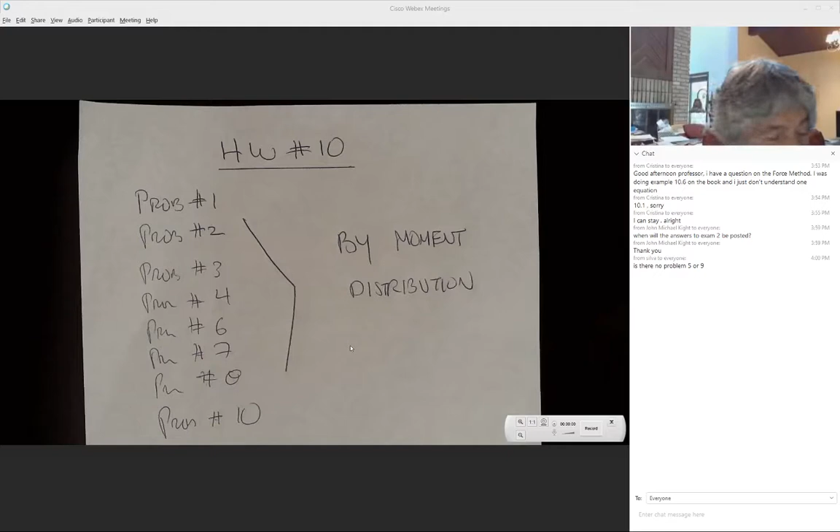Okay, we're ready. Welcome back. Probably you already seen my email. The university has changed the date and the time of the exam. Now your exam is on the 11th, and it is from 3 to 4:50. Also, there is a change in the amount of time that you get. You only get 1 hour and 50 minutes.

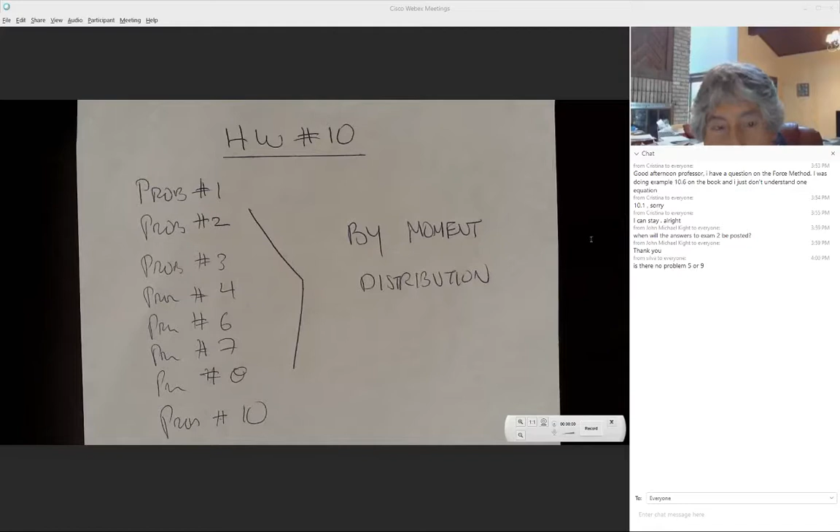Well, let me answer a question here. So in homework in the past, before we had some changes, we had homework number 10 and homework number 11. So now I had combined homework number 10 and homework 11 into just homework number 10. And these are the problems that you have to solve. You have to combine the problems that I put in Blackboard before from homework number 10 and homework number 11. And these problems are due on Wednesday next week.

So these are due on Wednesday next week. So it's not due on Monday. You have until midnight on Wednesday to submit. This is the last set of homework problems that I'm assigning. So I had combined number 10 and number 11 into the new number 10. So there's no problem 5, there's no problem 9. Does that answer your question?

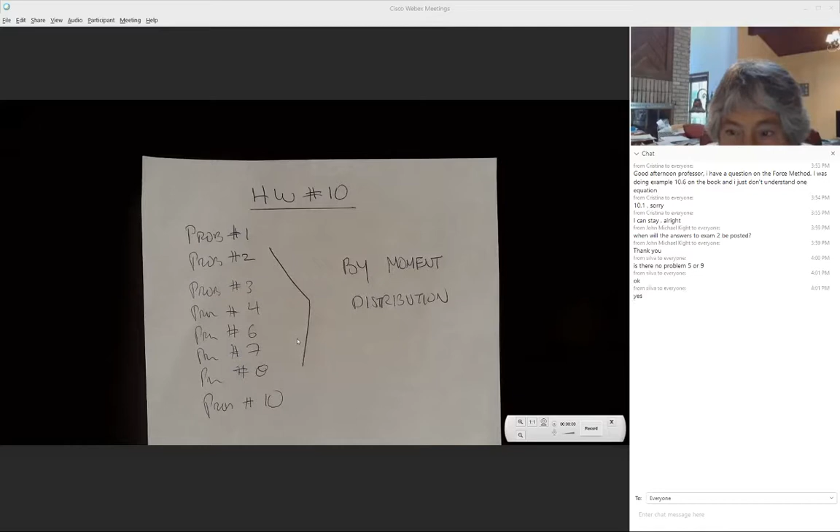Okay. Yeah. All right. So I was saying that the exam had changed. Now it's on a Monday on the 11th, only hour and 50 minutes. The results of exam number 2, as you know, were very disappointing, they were bad, and it's not your fault. It's just the coronavirus fault. So what I'm going to do in the final exam, just want you to listen carefully. I'm going to give you a bonus.

So the final exam is going to have 2 questions. One question where you're going to be able to get 100 points, and another question that is going to be a bonus. So I have not decided yet how much time I'm going to give you per problem. But probably the problem that is worth 100 points, you're going to get more time. But definitely, I'm going to give you a bonus to try to help in the next exam. Any question before I continue?

Okay, no question. Last time you said we all have 5 point bonus. Well, that was before we had all of this problem. Normally, for our reaccreditation, we need to pick up on most of the courses binders with exam, homework problems, class notes. I don't know if this is going to happen. I was going to give you maximum 5 points in your final exam grade. For instance, if you would have gotten 90, I would have given you maximum 95. If you would have had 30, maximum of 35. But I need to double check with the department chair if we're going to do that this semester because everything has changed. Any other question?

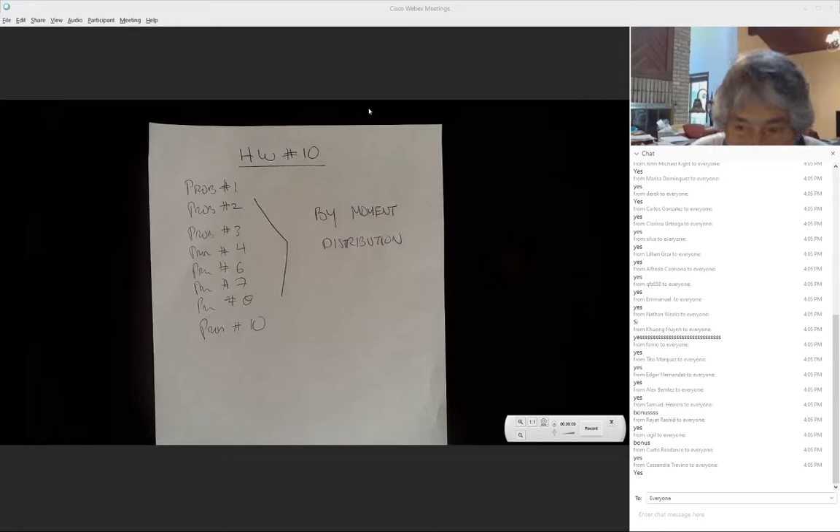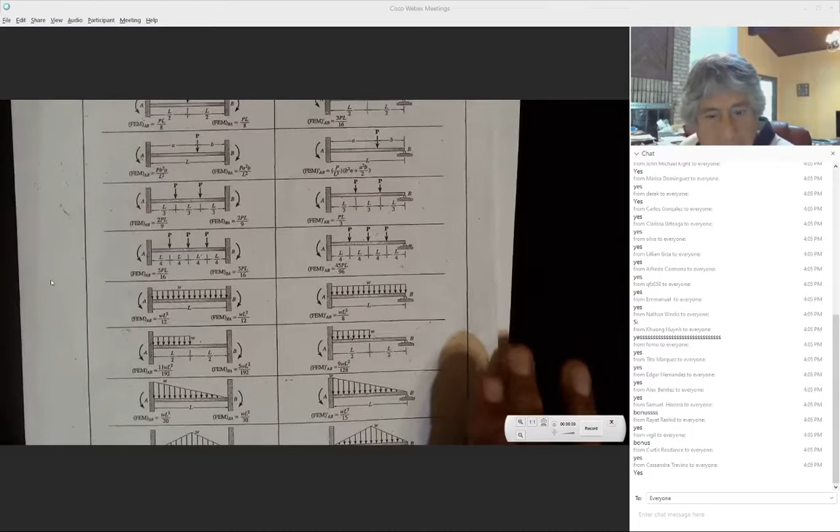I want to show you this case because all the others can be worked, or you can do the computation the same way that I'm going to do it for this one. This is a typical fixed-fixed case. Whenever we had a uniform load, the moment on the left is WL squared over 12. The moment on the right is also WL squared over 12.

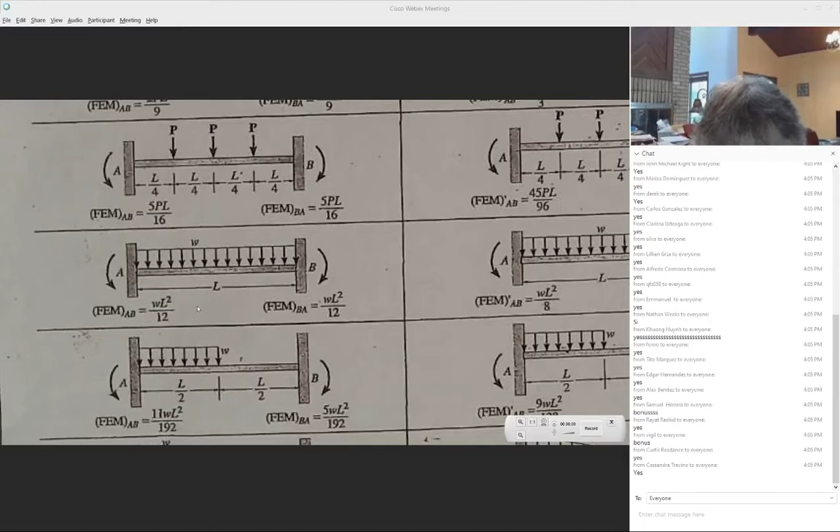If we remove this wall and put a pin, that means there is no moment. If we remove this wall and this one stays, this value is going to change. This value is going to be WL squared over 8. I'm going to show you how to find this value.

We can also leave this wall on and remove the other wall. These are the cases that are not in the table. I'm going to show you the first one. I'm going to remove this wall and show you how to compute this value.

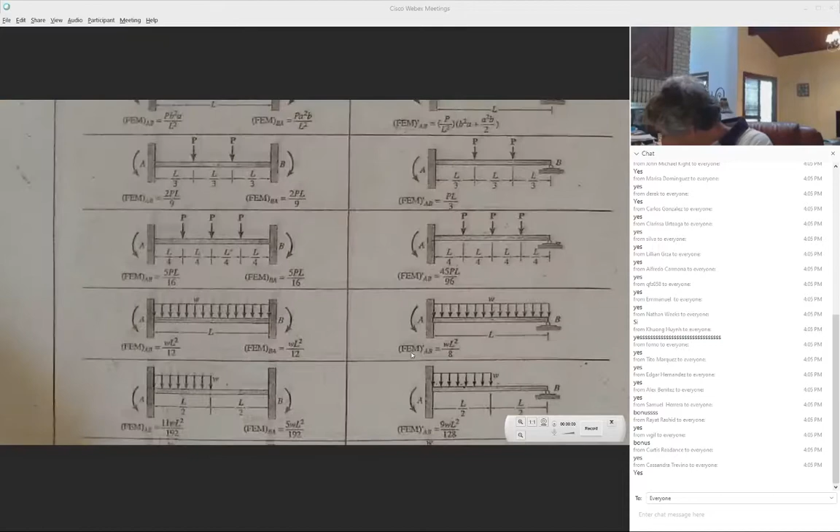We start with WL squared over 12. The one on the left-hand side is negative. The one on the right-hand side, according to the sign convention, is positive. So this is what we want to obtain, the one on the bottom: a pin, no moment, and a moment at this wall.

So what I did, I had this value here on the top that is plus WL squared over 12. And I put a negative WL squared over 12. That means that the moment is 0. Since I'm putting a negative WL squared over 12 on this side, I need to send 50% of this value to the opposite side.

So now in here, I had the original WL squared over 12, and I had a negative WL squared over 24. If you combine these two, it gives you a minus WL squared over 8. I'm going to show you again. So we start with this: negative on the left-hand side, positive on the right-hand side. We need to make this one 0 because we're going to change the support.

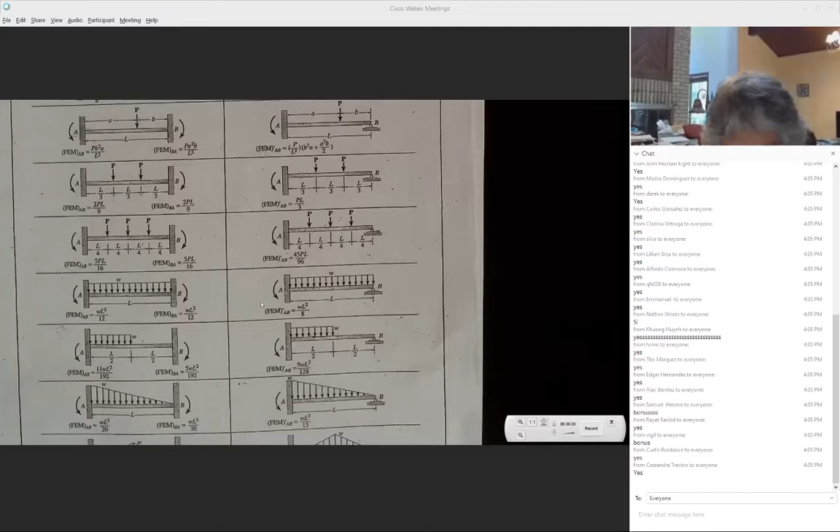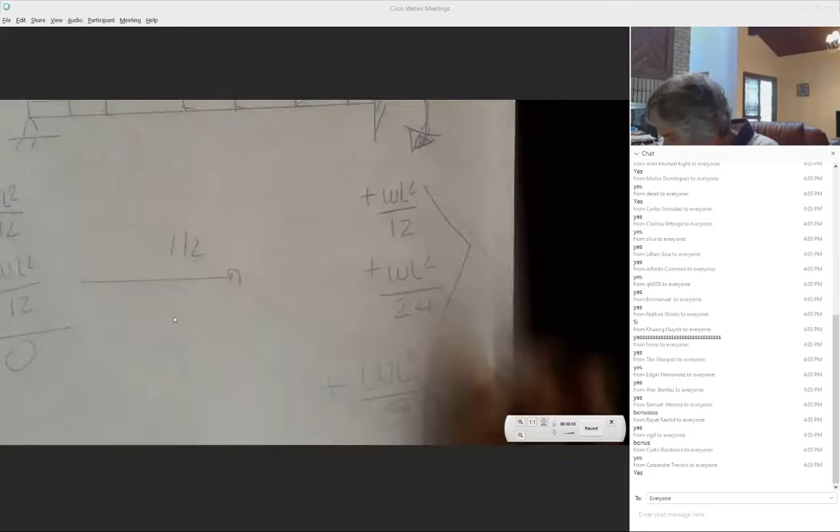This is what they have in here. I'm going to do something different that is not in the table so you will know how to handle these cases. Now I'm going to release this side and leave this one fixed. So we're going to start with the same WL squared over 12, negative on this side, positive on the opposite side. Fixed, fixed. I'm going to leave the wall on the right side, but I'm going to remove this.

So what I'm going to do, since this is negative, I'm going to put a positive, equal and opposite. So the moment now is 0. Whatever moment I put on this side, 50% goes across, of the same sign. So 50% of this is WL squared over 24. If you add those two, you have WL squared over 8, but positive and not negative like the previous one.

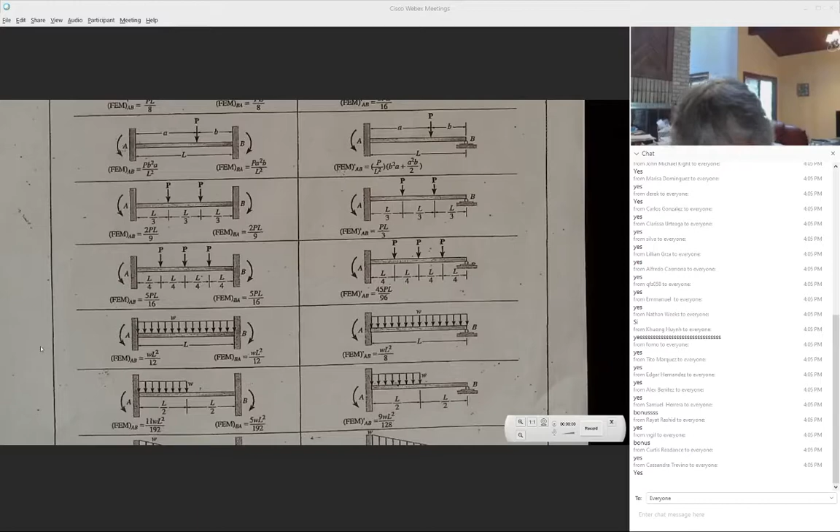So how do they obtain all of these values for each one of these cases? Equal and opposite, 50% across. So you can build this table, and you can also build any table, as long as you understand that whenever you put an equal and opposite, 50% goes across. So this is just a clarification because some people asked me during the week.

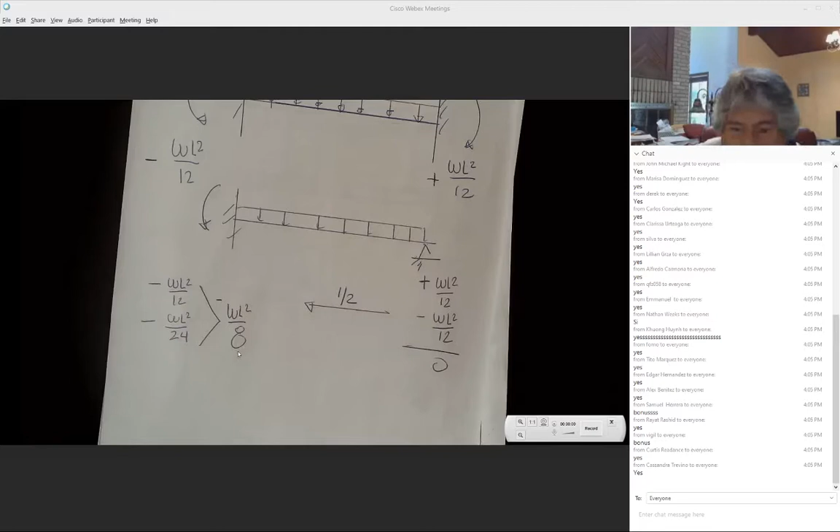Now I'm going to go to moment distribution again. There's nothing easier than moment distribution. This is the problem that I started the other day. And please pay attention.

And some people asked me several questions. This is page 4 of 18. This is the same problem that I was working on last time. Look, this is fixed. There's a moment in here. This is a fixed moment, and there are moments equal and opposite, BA and BC. And in this problem, I for the girder is different than the I for the column. So the stiffness of member AB is 4EI over 16. This comes from the previous method, from slope deflection.

The stiffness of this member is also 4E, but 4EI, but I is 1.5 over L. So this method uses the same as the previous one. It uses fixed end moment. So for this load that is at the center, it's going to be PL over 8 on this side, PL over 8 on the opposite side. This is going to be negative, this is going to be positive. And this comes from the table.

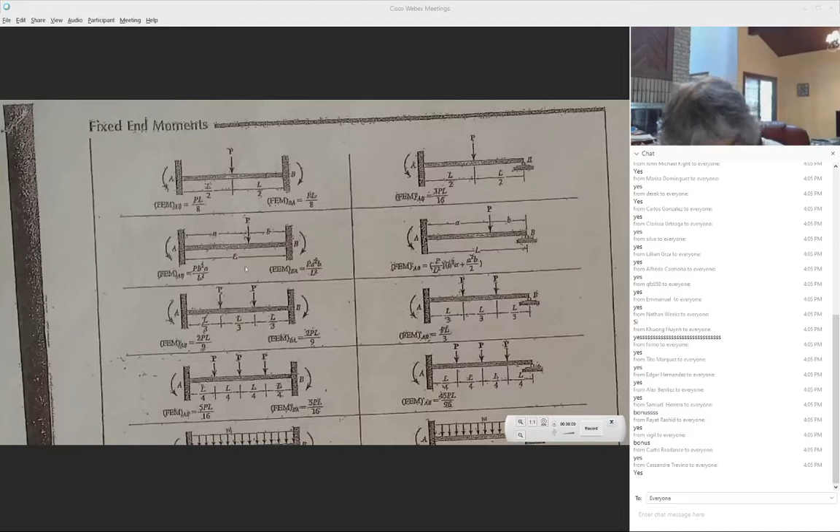This is case 1, the very case at the top of this page. This is PL over 8, PL over 8, because the load is at the center. If the load is not at the center, they call it letter A and letter B. And just in case, it doesn't mean that A is larger than B. It's just they are showing it that way, but you never change. This is A always, and this is going to be B. No matter how small or how large, this is A and this is B. But the moment, whenever it's not at the center, you compute it by this. So PL over 8.

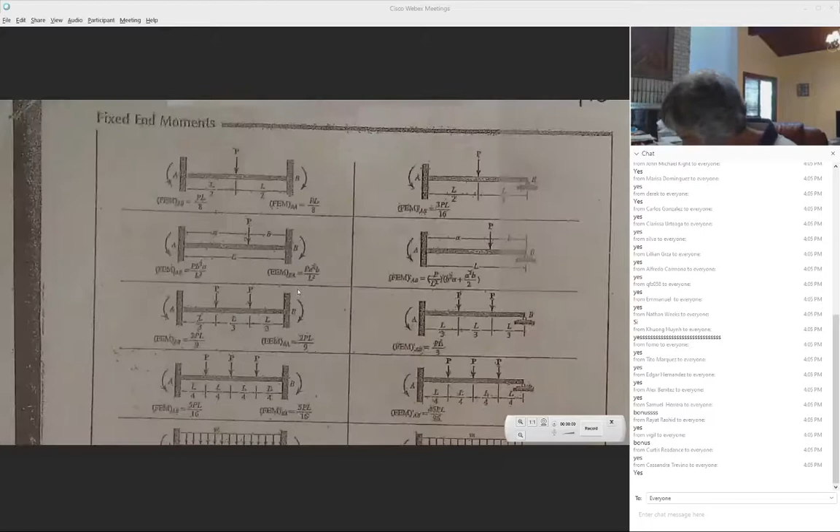So this is P, and 16. So I've done it in here. The one on the left-hand side is negative PL over 8, minus 40. The one on the right-hand side, PL over 8, positive, plus 40. These are the fixed end moments for member AB. Member BC, if you look at BC and I rotate this page, the one here on the left is similar to this one. That's why this is going to be negative and this is going to be positive. But also PL over 8.

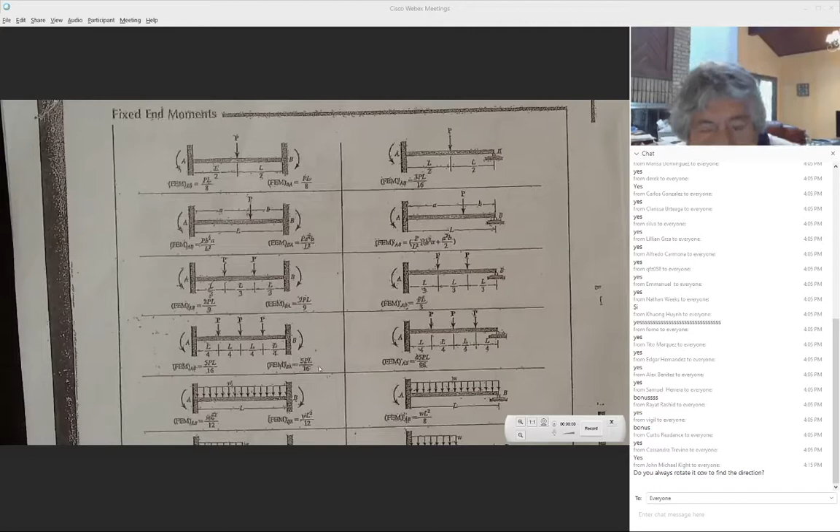I have computed it here for BC and CB. PL over 8 negative, PL over 8 positive. So you rotate to find the direction. We consider that, according to the sign convention, whenever you have a gravity load that is going down, all the moments on the left are going to be counterclockwise. All of these are negative. All the moments on the right are going to be clockwise. But I had rotated, if that is your question, because whenever we had a column,

whenever we had a column and the wind is blowing from right to left, this one on the top, John, tell me, is this one on the top positive or negative? Negative. And the other one is positive. Now I'm going to rotate the wind. The wind is funny, it comes now from this direction. The same case. Now the wind is coming from this direction, and this is a column. What is it, John? Is this positive or negative? Negative, right?

So there are certain cases where, for you to determine the sign, you might have to rotate the table, so it will be easy. But when you become familiar with the table, you just look at the load and you're going to know which one is positive and which one is negative. I mentioned it last week, and I repeat it again. In PL, L is the span, because a common mistake in the exams is they use 6 instead of 12. L is this span. That's why here at the bottom, I have computed PL over 8. 12 is the span. Negative, the one on the top.

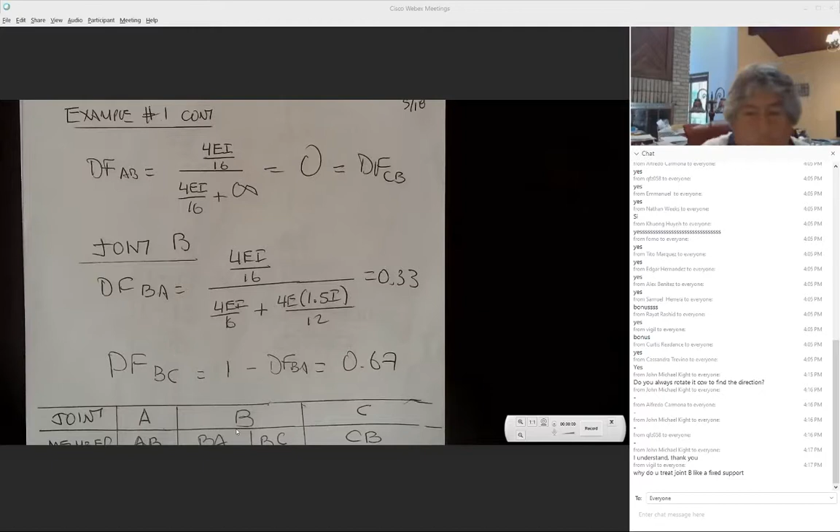It is called moment distribution because it distributes the moment based on distribution factors. The distribution factor from A to B, since we have a wall at A, is 0. The same at C. So what it means is that this fixed support at A and the fixed support at C do not return anything. Any moment that goes in here doesn't come back, because they have an infinite amount of resistance to the moment.

There is a question from Vigil. Why do you treat joint B like a fixed support? Okay, please, somebody help me. Why do I treat joint B as a fixed support?

Anybody? And he's talking about the moment that I'm computing. No, what it is, the fixed end moment. Always consider that the moments are fixed. And later they allow the rotation. If it's not fixed, they allow the rotation.

So to compute the fixed end moment, we assume that everything is fixed. That's why, look, this A is fixed, C is fixed, but B is not fixed. B has a rotation. But to start the problem, to compute the fixed end moment, we always assume fixed. The same that we did for the previous method. We compute the moment called fixed end moment because we assume that this is fixed and this is fixed. And later, we're going to allow the joint to rotate.

Vigil, you understand that? Okay. So remember, we assume like we did in the previous drawing, fixed to start. That's why we had to compute the fixed end moment from A to B, from B to A, from B to C, and C to B. We always compute the fixed end.

I was saying that the fixed support, you can put an infinite amount of moment. So the distribution factor is always zero. It means that it doesn't return anything that you put at that joint. That's why the distribution factor from A to B at the support is zero, the same as C. But at joint B, we're going to distribute the moment based on the stiffness of the joint. Since the joint has different stiffness, look, 4EI and 4E times 1.5I, 16 and 12, they're different stiffness.

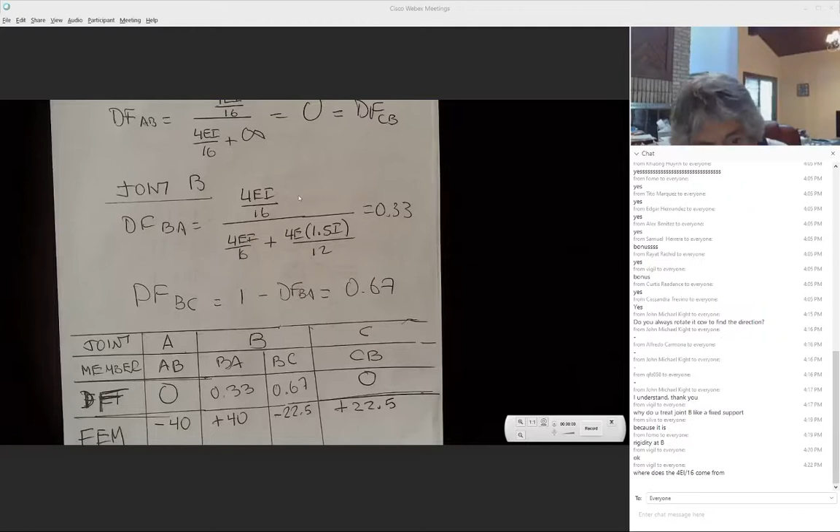So for member BA it's 0.33, for member BC, 1 minus the previous one. They always add up to 1 because that means 100%. What we're doing in here is a proportion. So if one is 33%, the other is 67%. And after that, I asked you the other day to build this table with me. So in this table, we put the joint A and member AB.

Look, joint A has member AB. Joint B has members BA and BC. And joint C has member CB. You see, joint A has member AB. Joint B has two members, BA and BC. And joint C has only one member, CB.

After that, we put the distribution factor. AB fixed support 0, CB fixed support 0. And BA, we computed at 0.33 and BC 0.67. We have to be careful. I'm going to answer your question, Vigil. We have to be careful where we write it. Okay. The stiffness, member AB, 4EI over 16. And the 4EI comes from this.

So whenever we had a near end that is pinned and a far end that is fixed, whatever we put in here, 50% goes across. So the carryover factor was equal to 1/2. Later, we're going to modify the stiffness. Later, we're going to do this. The near end is pinned, but the far end is also pinned, the end of a member. So there's still a theta A in here. But this moment is only 3EI theta A over L, and nothing goes to the opposite side because it cannot take it.

So whenever we modify the stiffness, we're going to use 3EI over L. Whenever we don't modify, 4EI over L. So those are the numbers that we use. So the stiffness of this member is 4EI over L. The stiffness of this member is also 4EI over L because I'm not modifying the stiffness. Later, in another problem, I'm going to use 3EI over L. Okay, anybody have another question about the 4EI? All right. So remember the stiffness comes from the previous one.

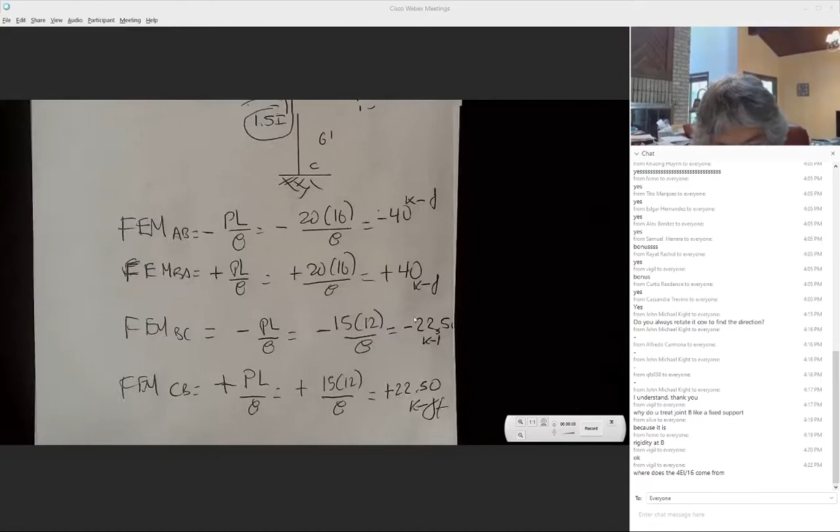So what we had to do, we built a table. And in this table, we already had the distribution factors, and I was telling you, we had to be very careful not to reverse this. BA has to go in the BA. BC has to be in the BC. We cannot reverse this because we're going to change the problem. These are the fixed end moments, assuming that it's fixed, minus 40 plus 40. I did a computation in here. Minus 40 plus 40, minus 22.50 plus 22.50.

So this is the way we start the problem. We have to have distribution factor and we have to have fixed moment. The fixed supports are always in equilibrium because you can put an infinite amount of moment in the fixed support. So A and C, they're always in equilibrium.

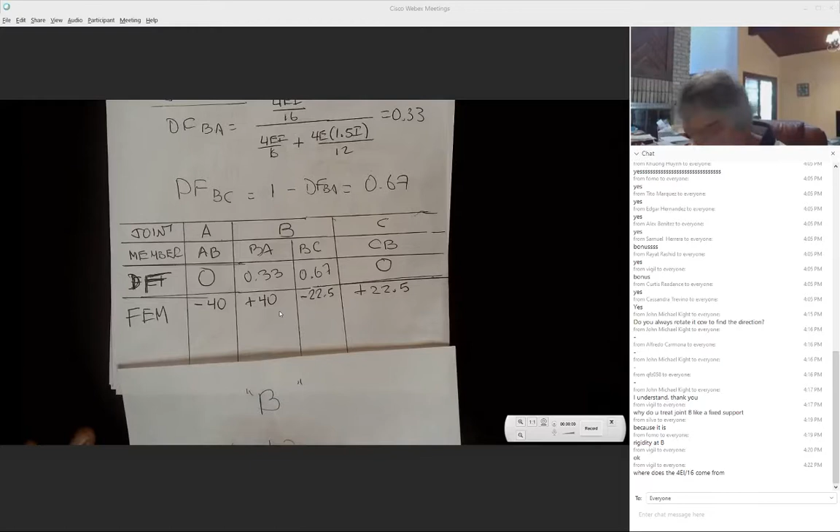Joint B right now is not in equilibrium because of the moment that we have right now at B. At joint B right now, we have plus 40 minus 22.5. The summation of moments at any joint has to be equal to 0. So if you look at plus 40 minus 22.5, right now we had a plus 17.50.

Joint B is not in equilibrium because we had a plus 40 minus 22.5. Right now, we had a 17.5 moment at this joint. To put it in equilibrium, we need to put an equal and opposite moment to the joint, so the sum is 0. That means equilibrium. So at this joint, I'm giving a minus 17.50.

33% is going to come to this side because that is the distribution factor. That's how we distribute by stiffness: the stiffer member receives more moment. So 33% goes here, 67% comes here. Whatever moment I put in here, 50% goes to the opposite side because of the carryover factor. And this is what we did the other day.

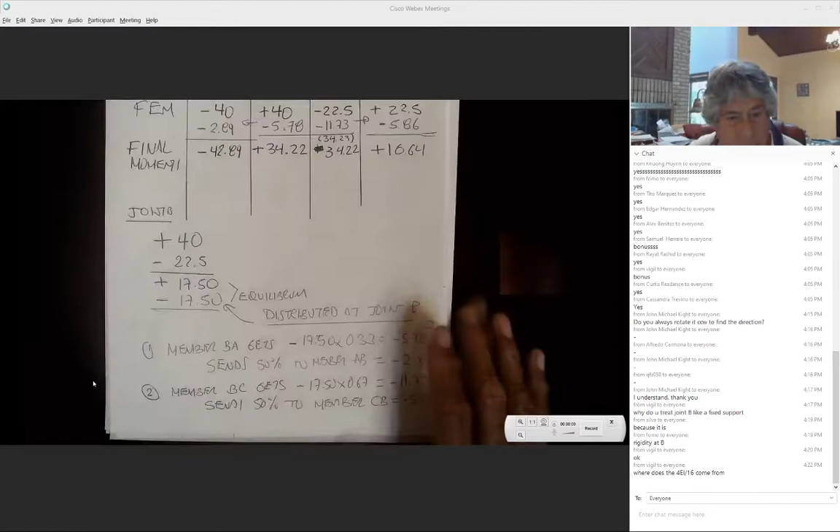So if you look at the notes, at joint B right now we had a plus 17.50. To put it in equilibrium, meaning summation of moments equal to 0, we need to give a minus 17.50. How do we distribute? Member BA gets 33%, 5.78. Member BC gets 67%, 11.73. Remember the sign, minus. The carryover factor takes 50% across, minus 5.86.

Whatever I put in here, the carryover factor takes 50% across. And since the fixed support can resist an infinite amount of moment, there's nothing left. This is like when you balance the checkbook, there's nothing left to pay. That's it. So the problem is finished. We put a line in here.

So we start with fixed moment, and this joint is not in equilibrium. We put an equal and opposite moment, that was minus 17.50. To this side came 33%. To this side came 67%. Whatever moment I put on this side, 50% goes to the opposite side. Nothing comes back. So this is the end of the problem.

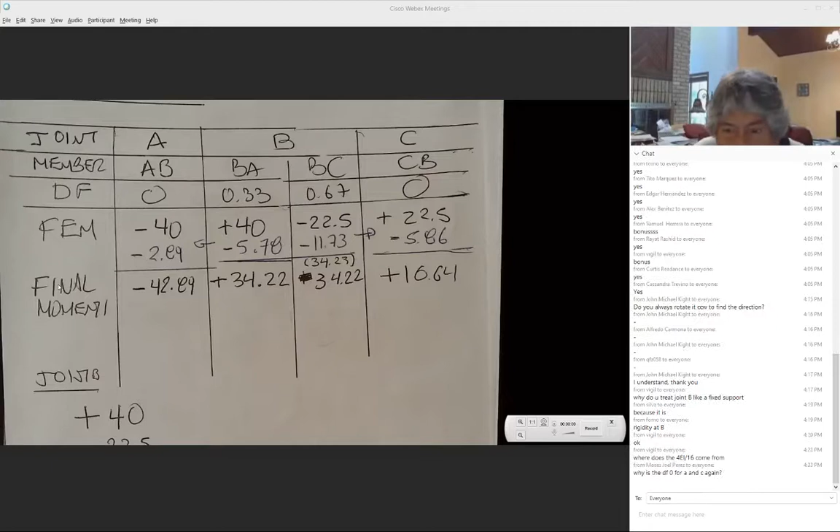Sure. This is joint AB, right? This is the wall. So here at the wall, we had two stiffnesses. We had a stiffness of this member, that is 4EI/16, and the stiffness of the wall, that is infinite. It's so stiff, it cannot be moved.

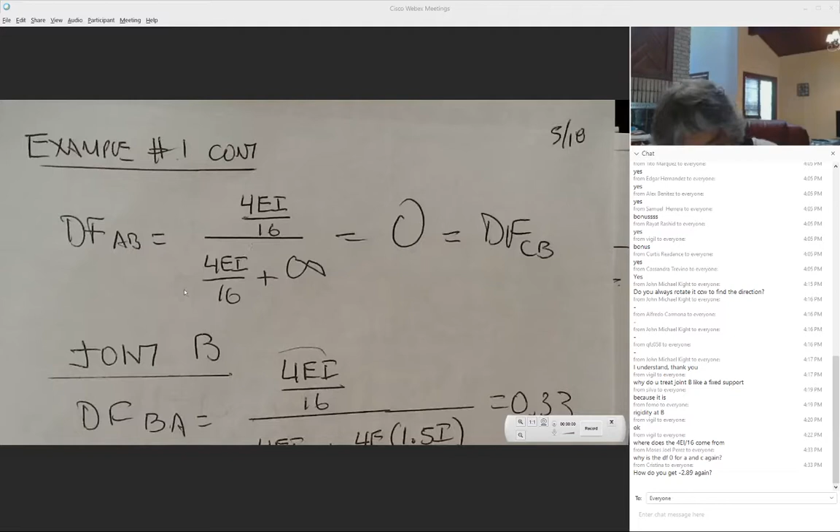So to compute the distribution factor at the support, AB is 4EI/16 over the stiffnesses of all the members framing into this joint. This is member AB, this is the wall. So anything that you divide by infinity is 0. That's where the 0 comes from. Does that answer the question?

Are you going to tell us when to use the carryover factor or not? It's obvious when to use it. You're going to see it in more problems. Okay, now, Christina, second: where the minus 2.89 comes from.

So, Christina, I don't know if you have your calculator, but I'm going to do the computation for you. Look, we had in here joint A and C, there was an equilibrium. This joint B is not in equilibrium because if we had plus 40 minus 22.5, this gives us a moment. Look, plus 40 at joint B minus 22.5, we had right now a positive moment of 17.50.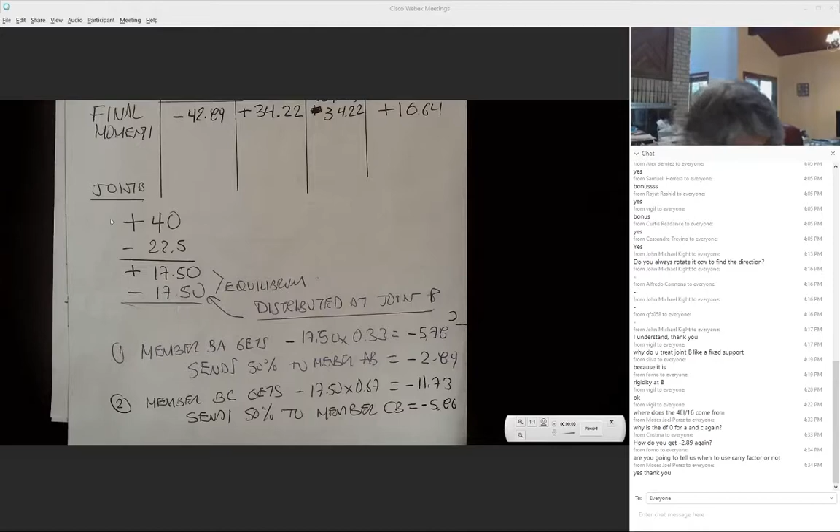To put in equilibrium means summation of moments equal to 0. So if I had a plus 17.50, I need to give to the entire joint an equal and opposite moment, minus 17.50. How do we distribute this? 33% of this moment, the negative, comes to here. This is the value. Minus 17.50, 67% comes to here. This is the value. Whatever I put at this end, the carryover factor is 1/2, send it to the opposite. Whatever I put in BA, I had to multiply times 0.5, the carryover factor, send 50% across.

And so, in other words, whatever moment I put in here, 50% goes to the opposite end, as long as this is a wall or can resist the moment. Whatever I put in here, 50% goes up. So where does that come from? From the previous method. The moment in here is 4EIθ/L. 50% of this moment goes across, is only 2EIθ/L. So the carryover factor is 1/2.

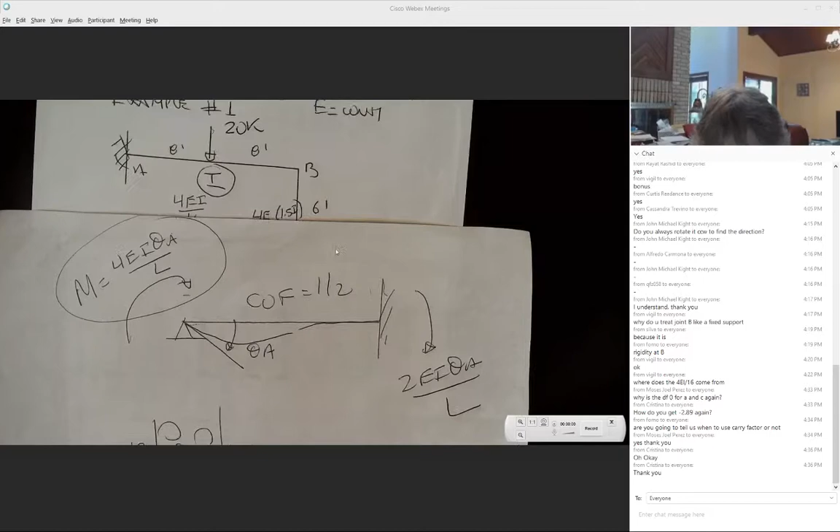So whatever moment I put in here, this little arrow indicates that 50% goes to the opposite end. Whatever moment I put in here, 50% goes to the opposite. So we add all of these moments, and these are the final moments. So to work our free body, from the original problem, I'm going to take free body AB. Free body AB from the original problem is going to have the load, 8 feet, and I'm going to call this AY and BY.

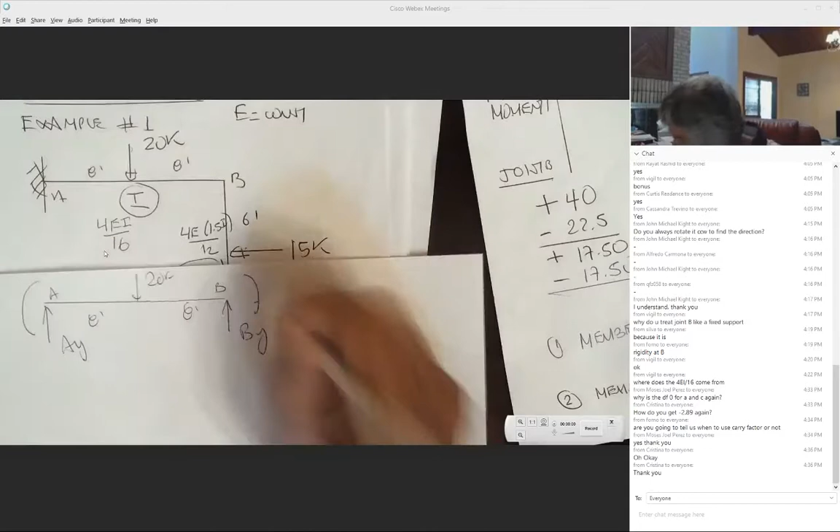But now I need a moment. I need the moment AB and the moment BA. So I come to this table. Look, AB 42.89. So this moment is 42.89. And moment BA is 34.22. So from the table, we got 42.89 and 34.22.

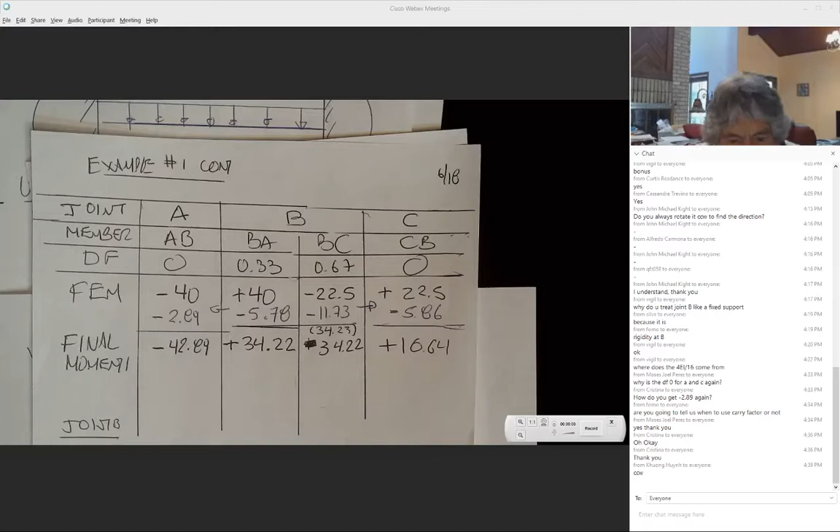But what is important is the direction. Counterclockwise or clockwise? Look at this. Minus 42.89. Anybody? Counterclockwise. And 34.22 positive, what direction? Clockwise. Perfect.

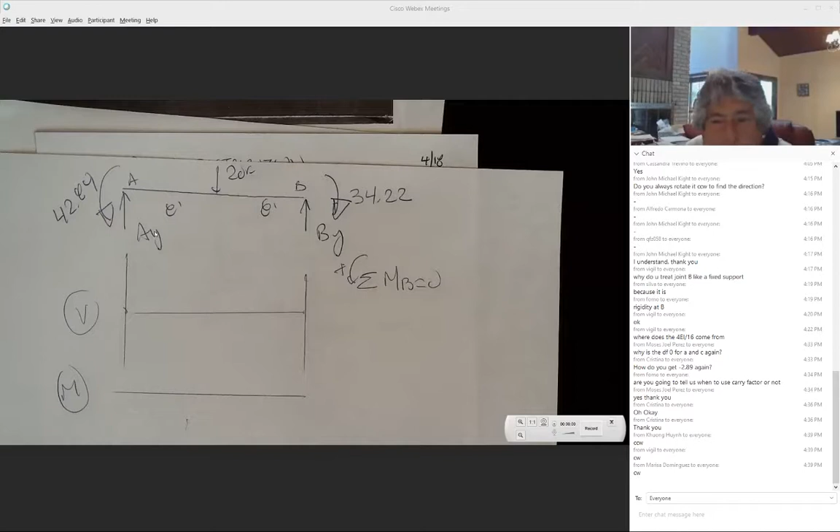So this is what we had now. We need to plot the shear and the moment diagram. So this is going to be my shear, this is going to be my moment for the indeterminate structure. So I need to find AY and BY. To find AY, I'm going to say summation of moments about B equal to 0. So we are back to chapter 1, back to what you've been doing since you took statics for the first time, when you took mechanics of solids, computing reactions.

So I'm going to do summation of moments at B equal to 0, and just for the equation, I'm assuming that that's the positive direction for my equation. You could assume the opposite direction as positive, the answer is exactly the same. But you have to consider all the forces. AY times 16. Because it's opposite to my assumption, it goes with a minus.

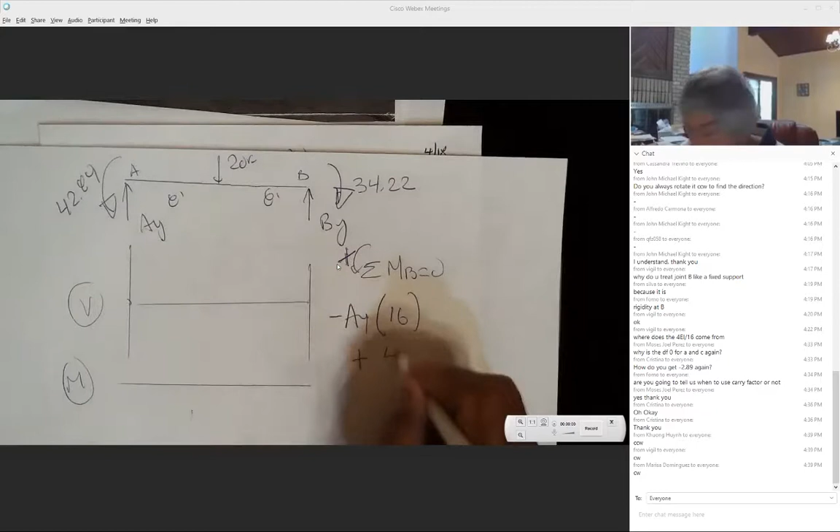Plus 42.89, because it goes in the counterclockwise direction as indicated in here, minus 34.22, plus 20 times 8 equal to 0. Look, I have applied moments about this point. Minus AY times the distance 16 plus 42.89 minus 34.22 plus 20 times 8 equal to 0. We find this reaction and we find that reaction, and this is what I've done in the next page.

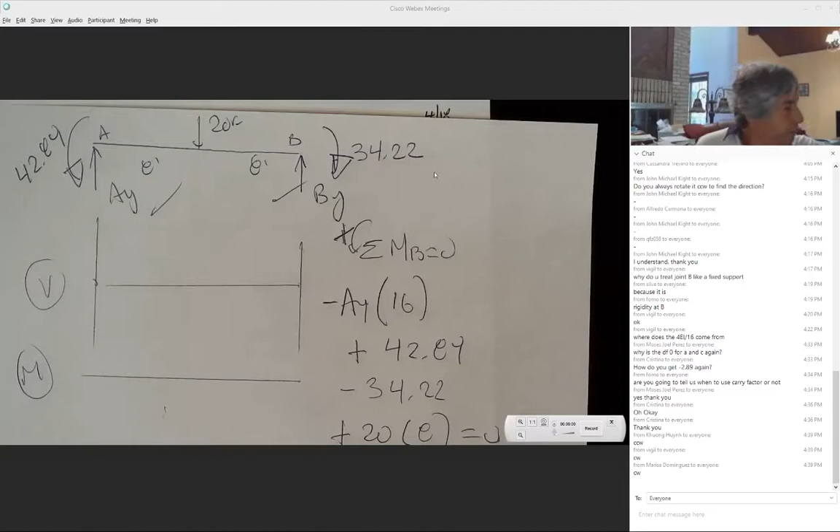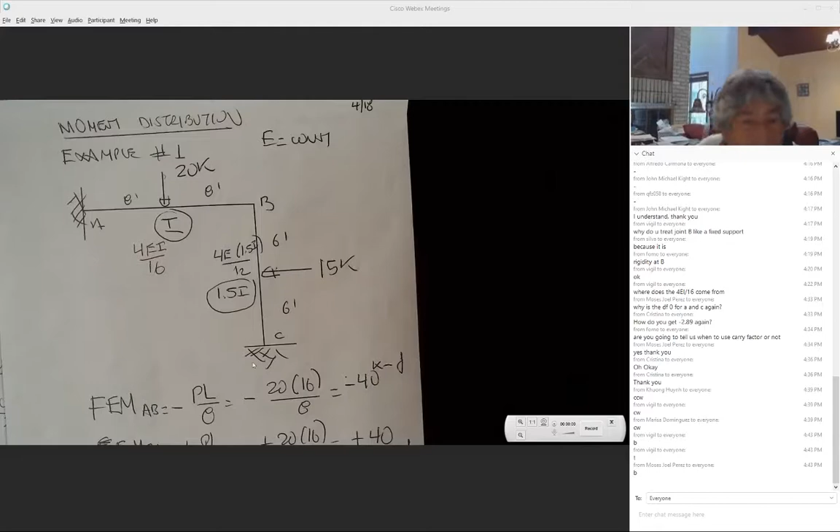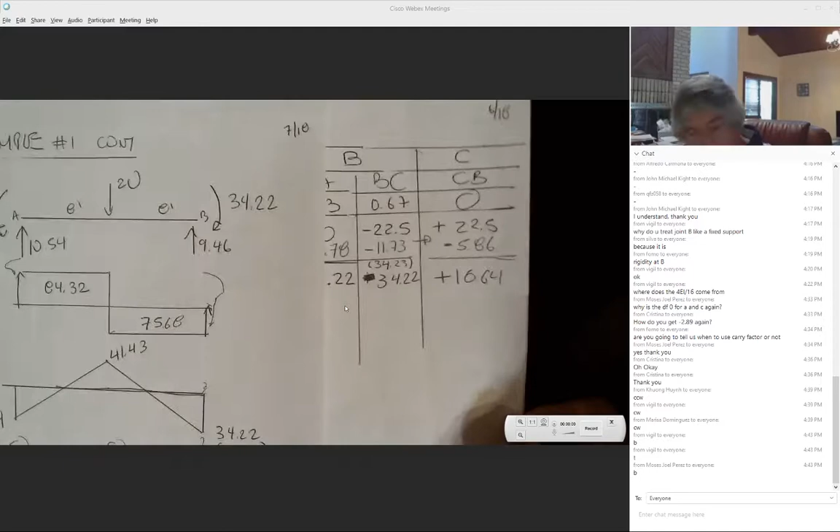I did the same for this member, look, for the column. The column is member BC. I'm going to put this 15 and the moment that I found. BC minus 3422, CB 1664. You look at the column here, we had BC, minus 3422, counterclockwise. CB 1664, clockwise, I put it in here.

I computed the reaction the same way that we did it before. These are the moments that come from the table. Apply moment about this point, I solve for this. I sum forces in X, I solve. I did my shear diagram. Go from 0 to 897 constant, minus 15, it goes to 603, close it back to 0. This in here, 5382.

Look at this moment, 3425. Where does this moment go? To the left or to the right? Anybody look? Look at where's the compression, left or right? Left. I put it in here. So this is a minus 3422 because at the bottom, plus 5382 because on the top gave me 1960. Plus 1960 minus 3618 because at the bottom, it gave me 1658, and expecting 1664, almost the same.

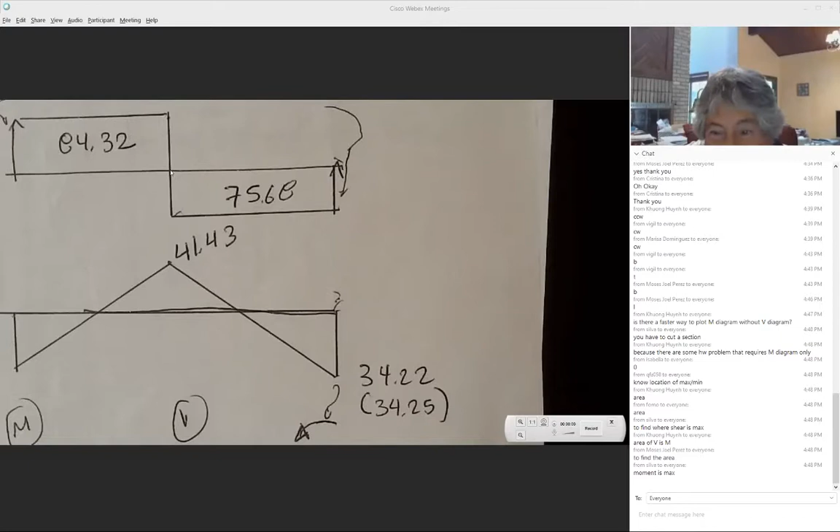No. Look, what were you told by Patricio or anybody when you took statics? What happens when the shear is zero? When the shear is zero, what happens? The moment is a max. We need to know where the shear is equal to zero. You can write equations and do the same, but with the shear diagram, it's fast. But the only reason is because when the shear is zero, the moment is maximum.

And whenever you do a design, remember, we design for the maximum negative and maximum positive, because one means the bottom of my beam, the other one the top of the beam. You're going to be taking reinforced concrete next semester. You need to know where the tension is. And wherever we have tension, we're going to put the rebar.

Because concrete is a beautiful material for compression, as you already know from the testing that you have done in the materials lab. Concrete, very strong in compression, very weak in tension. About 10% of the compressive strength is the tensile strength of concrete. So next semester, when you design concrete, wherever you have tension, you're gonna put the rebar.

If this were a beam on this side, where is the tension on this side of the beam? Top or bottom? In here. Anybody? Top. Opposite to compression. Where is the tension here? Top or bottom? Bottom. And in here on the top. So the rebar from the top goes to the bottom. And that's the way we do the rebar. Any question about this problem before I go to the next one?

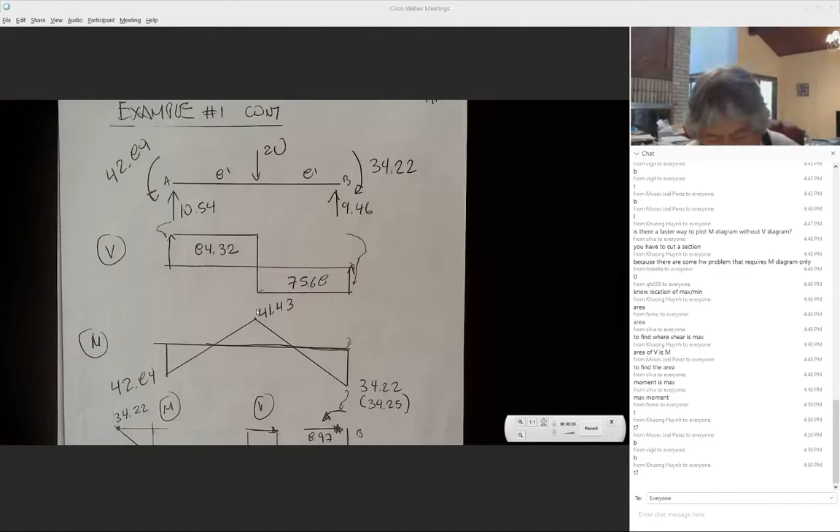This is page 9 of the note. So for this problem, EI is constant. Span AB, 30 feet. Span BC, 30 feet. Span CD, also 30 feet.

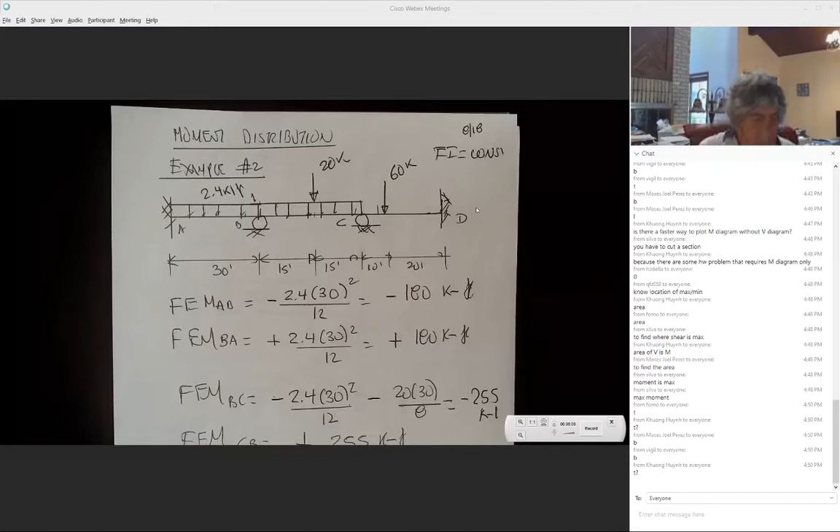Uniform load from span A, B, and C, the two spans, 2.4 kips per foot. There is a point load here, or concentrated load, in the middle. And there is a point load here closer to the left support than to the right support. So I want you to look at this problem very carefully.

I have no idea how big or small you can see this in your screen. I know that some of you are in bed right now using your iPhone and looking at this, and some of you probably already watching TV with one eye, the other eye this, and your computer. But look, I don't know how big this is. Almost the biggest size that I can.

Now my question to you: when I finish all of this, do I have a moment? Am I going to find a moment at this wall? Yes or no? When I finish doing all my computation in 30 minutes. Okay. So there's not going to be a moment at the wall? Definitely going to be a moment at the wall, because that's what the wall does.

But now a question for everybody. When I finish, this is a roller. Am I going to have this moment BA? Yes. And a moment BC, because this is a continuous member that is going to deflect like that. So there's going to be a moment BA and BC, equal and opposite. There's going to be a moment CB and CD. And there's going to be a moment at the wall DC.

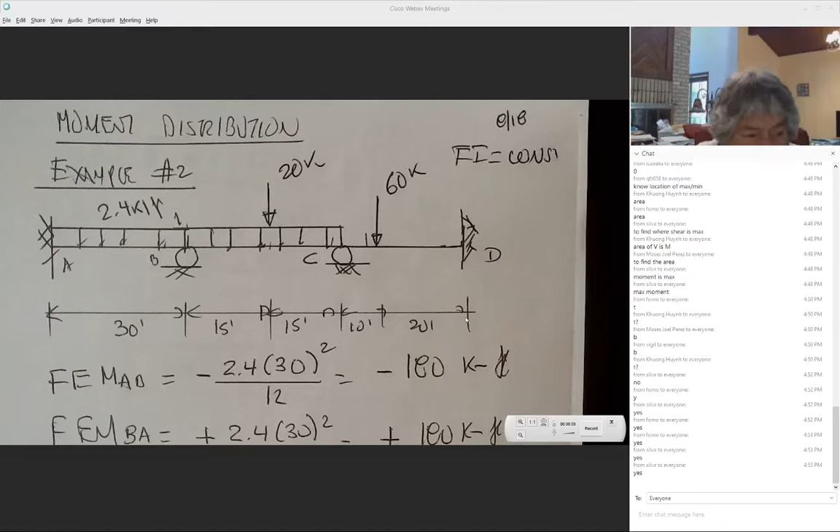So, look, we have to determine the stiffness of this member. I'm going to write the stiffness for member AB. The stiffness of this member is 4EI over 30. 4EI over L is the stiffness of member AB, because both sides can take a moment.

The stiffness of here is also 4EI over 30, because this side and this side can take a moment. And the same in here, the stiffness is going to be 4EI over 30. So I'm going to use this value later to compute distribution factor based on your past experience of one problem. What is going to be the distribution factor at this wall? When I had this member and the wall, what is going to be the distribution factor in here?

0. And look in here, we had two members framing into this joint. One is 4EI/30, the other one is also 4EI/30. When I find the distribution factor from B to A, I'm going to have this divided by both of them. What is going to be the distribution factor of this side? Again, I had this number divided by the summation of this number and that number. If these two numbers are the same, it's going to be 4EI/30 over the summation of these two.

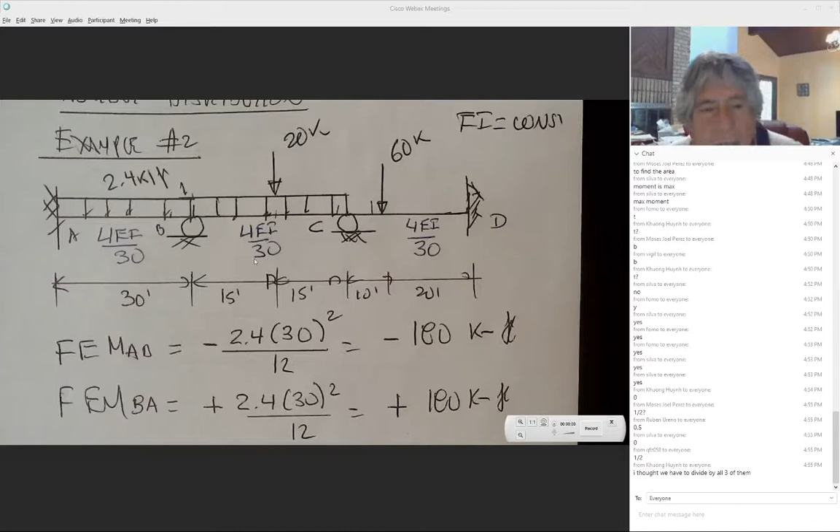Okay. This is a good question from my friend Khuong. He's saying that we had to divide by all three of them. How many members are framing into this joint? Khuong, how many members are? Two. So we had these two still. How many members are framing into this joint? Again, how many members? 2. Now I'm going to show you something else.

First question, is this a determinate or indeterminate structure? Indeterminate. 3 plus 3, 6, 8 minus 3, 5th degree indeterminate. How many members do I have framing into this joint? I know you already got it. How many members? So I had to have 3 distribution factors. 1 in here, 1 in here, 1 in here.

I'm going to change the problem. How many members I have in here? 4. 1, 2, 3, 4 distribution factors. That's a good question. Good. Go back to this.

Look, it's very difficult to pay attention. Even when we are face to face, you're on your phone, Tinder, or buying a new phone. You're always... But you have to pay attention for this because your life will depend on the final exam.

This is indeterminate. 3 and 3, 6, 7, 8 unknown, minus 3, 5th degree indeterminate. We're going to have moments. This is a continuous beam. So moment at this end, moment at this end, moment here, moment in here, moment everywhere. That's what we use for EI. Look, this is a uniform load. We have to compute the fixed end moment. So in order to solve the problem, we have to compute the fixed end moment.

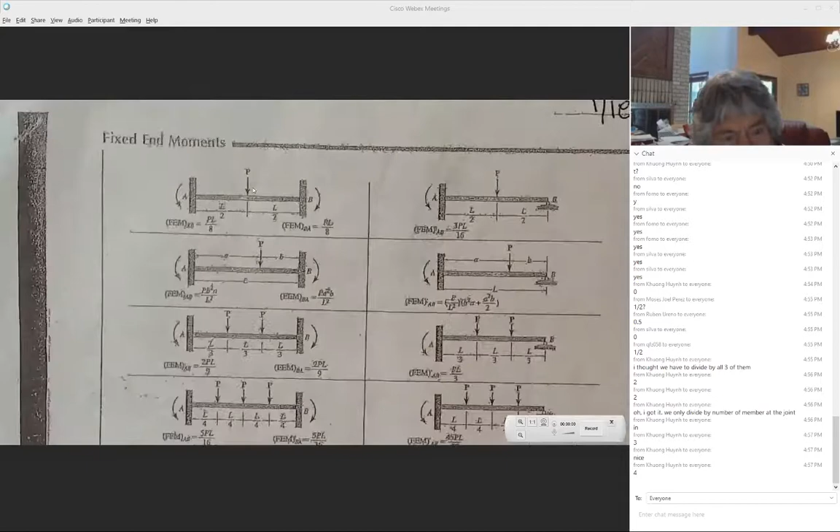BC, we had uniform load and we had a point load in the middle. So the moment on this side is going to be WL squared over 12 plus PL over 8. The same is going to happen in here, WL squared over 12 and PL over 8. Why PL over 8? Because the load is exactly in the middle. So we're going to combine this value with this value in here, and this value with that value in there. Both of them go in the same direction. Gravity load going down.

So this is what I've done here. BC, WL squared over 12 plus PL over 8, minus 255. For CB, it's going to be WL squared over 12 plus PL over 8, positive 255. I didn't write it because they are the same. This is the one that is confusing, because the load is not in the middle. The load is closer to C than to D. Which moment is going to be larger, CD or DC? Anybody guess? Anybody else guess?

Look, the closer that you are to the support, this moment is going to be larger than this one. So whenever you do your computation, before you do the computation, this fixed end moment has to be larger than this one, because most of the load is going to go to this support. So this is what we're going to use. They call this A. No matter how small or how large, it's always letter A.

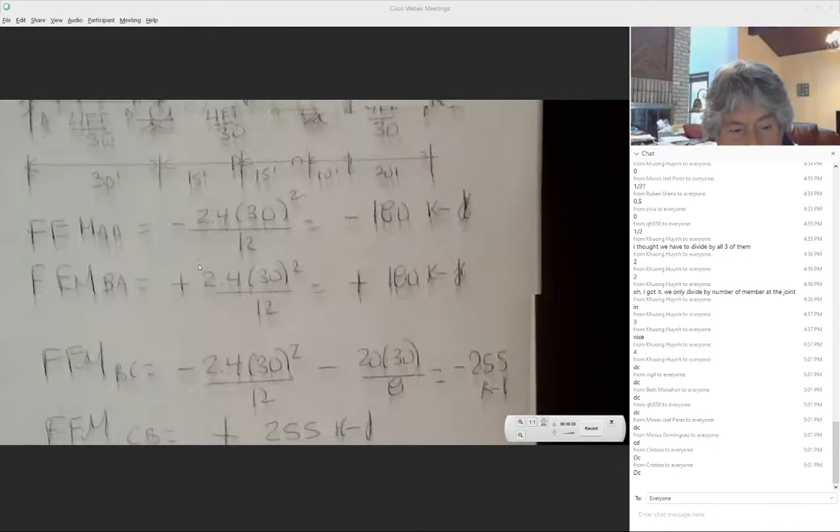This is letter B. The moment on this side, P B squared A over L squared. The moment in here is P A squared B over L squared. So the only thing that changes: one time this is squared, the other time this is squared. So this is what I've done in here. From C to D, 60 times 10 times 20 squared over L squared, minus 266, negative. From D to C, 60 times A squared times B over L squared, 133. So the closer you are to the support, the larger the moment is going to be.

So we have computed all the fixed end moments. We always assume fixed and compute the fixed end moments. Any question up to this point? I need a distribution factor. Right? So I put in here A and D, DF 0 because they're fixed. And in the next page, look, joint B. Joint B is this one. Two members, two stiffnesses, 4EI over 30, over the summation of those two. What I've done in here: 4EI over L over the summation of both of them, 0.5. Knew that because I asked you before. And the other one is going to be 1 minus the other, 0.5.

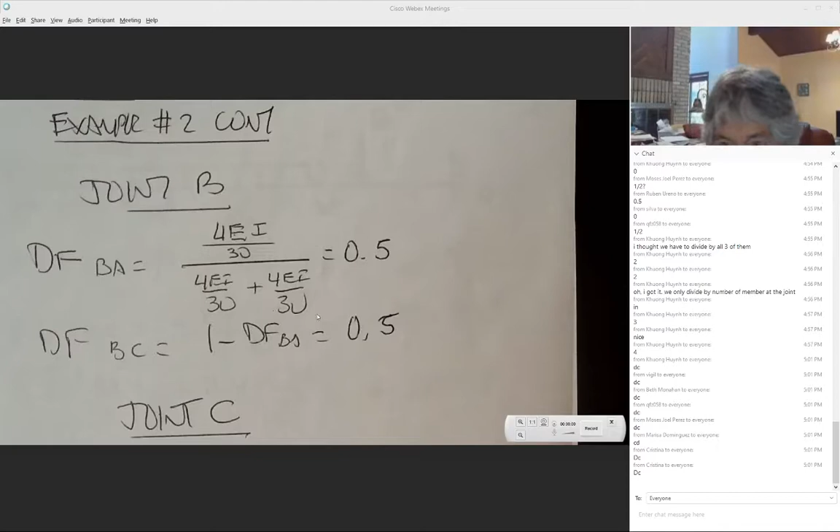Somebody has a microphone on, please turn it off. You can turn it on later.

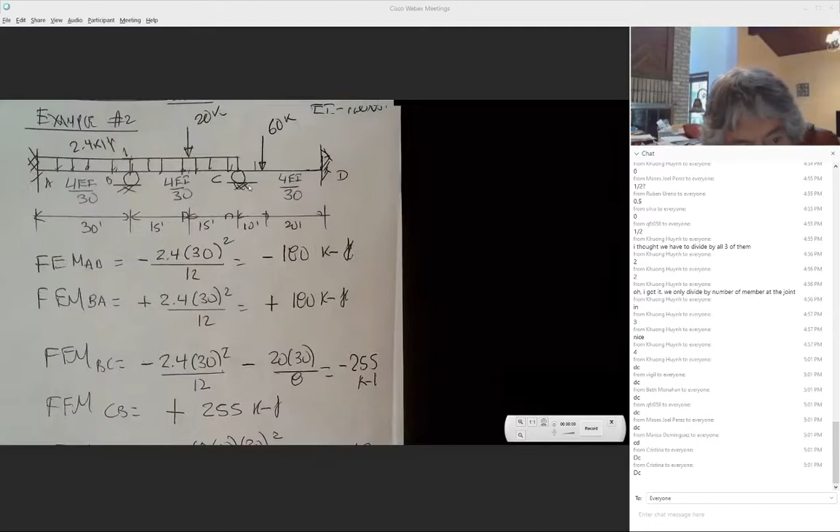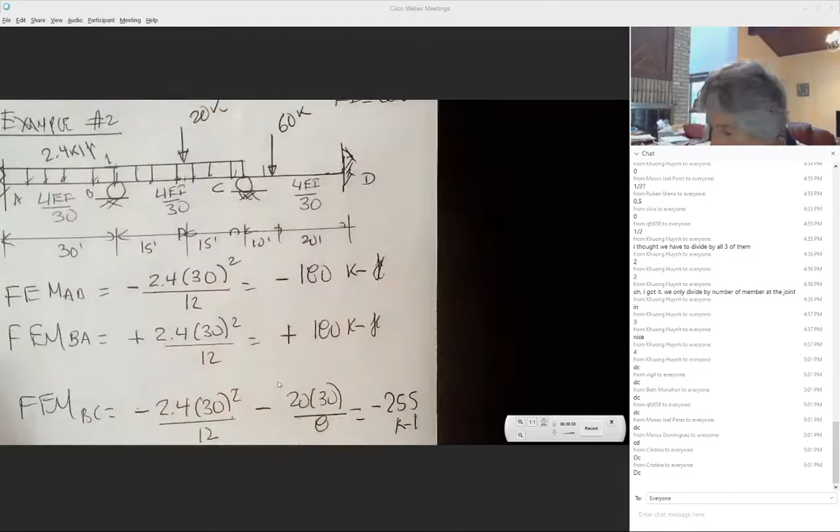Joint C. Joint C, we had two members, CB and CD. 4EI over 30 over the summation of 4EI over 30 plus the same 4EI over 30. So joint C, the same, 0.5 and 0.5. My table is going to have joint A with member AB, joint B, BA and BC, joint C, CB and CD, and joint D, you're going to have DC. So this is what I have done in here, at the bottom of the page, and this is page 9.

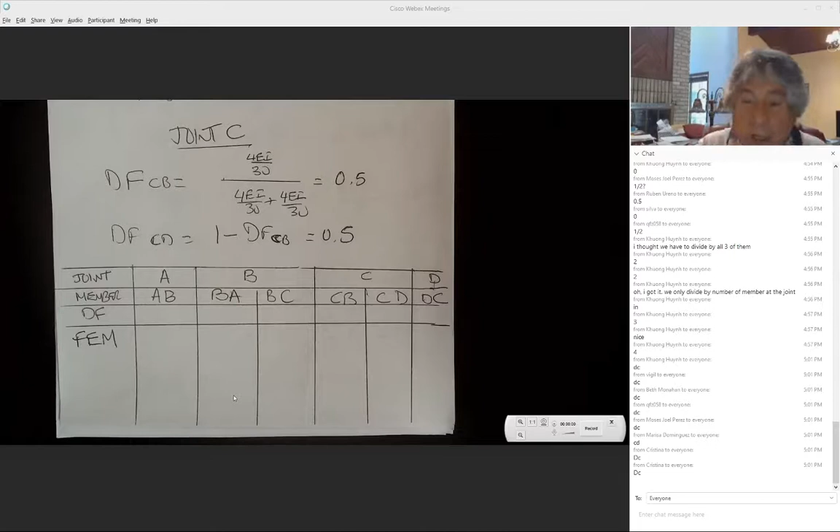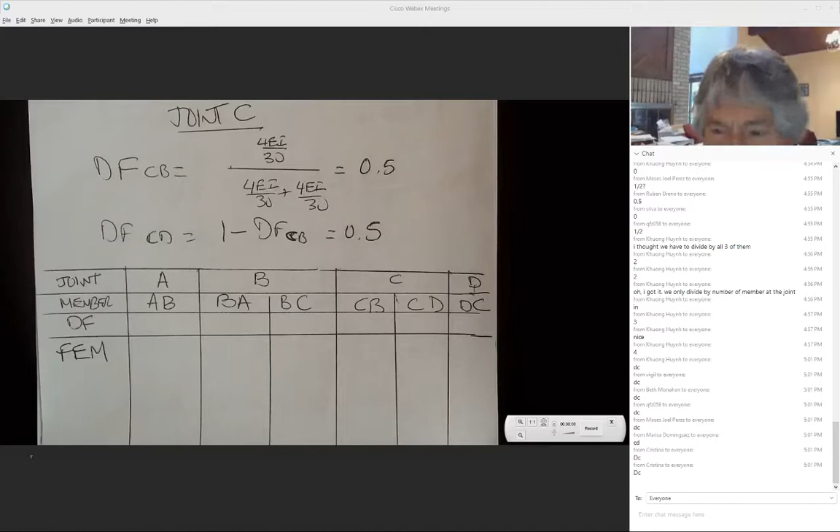So you had joint A with member AB, joint B has BA and BC, joint C has CB and CD, and joint D, DC. Distribution factors for the fixed support, 0. For the fixed support, 0. We already computed the distribution factor from B to A and B to C. It came out 0.5 and 0.5. We also computed C to B and CD, 0.5. Now we need to write the fixed end moments. The fixed end moments are computed in here. AB minus 180, BA plus 180.

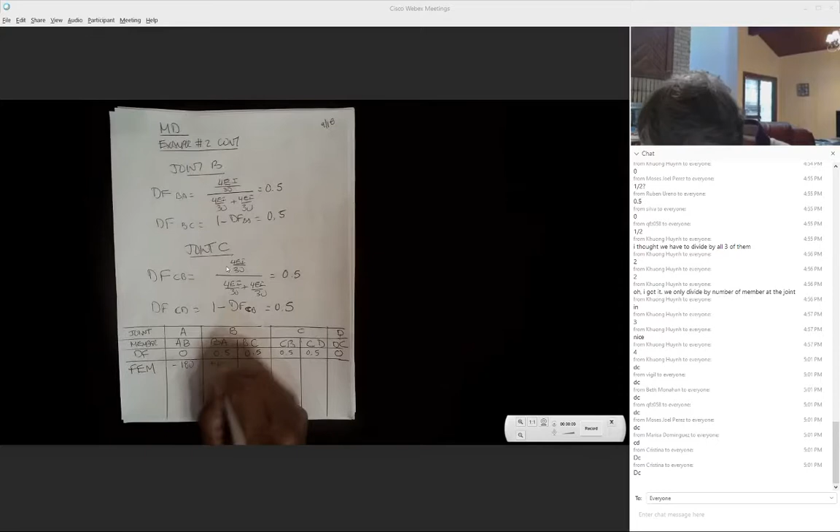So this is WL squared over 12, WL squared over 12, minus 180 plus 180. The next fixed end moments, BC and CB, are computed in here: minus 255 plus 255. And finally, I had to put the moments CD and DC. They are in here: minus 266.67 plus 133.33.

So this is the beginning of the problem. Anybody has any question where these numbers are coming from? Negative, positive, negative, positive. Anybody, any question about the fixed end moment?

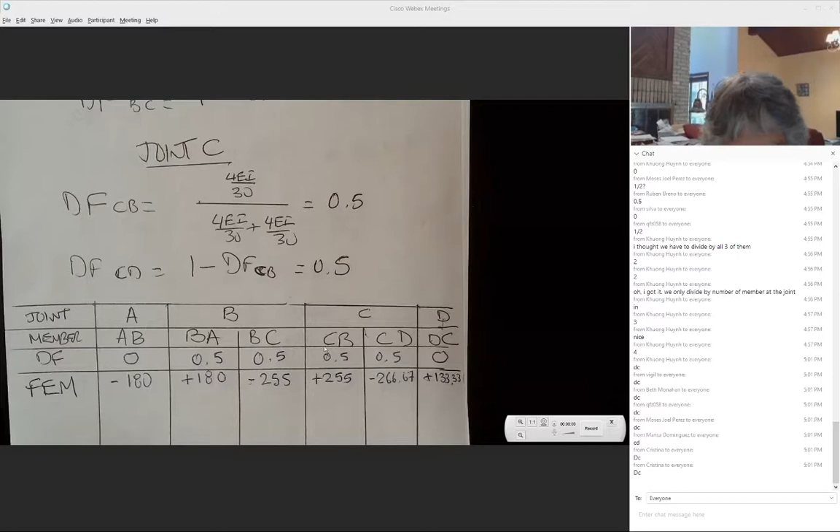So joint A is always in equilibrium. We call it a taker. It stays, never returns anything. Joint D also. Joint B and joint C, they are not in equilibrium. If you look at these two joints, joint B and joint C, they are not in equilibrium. Why am I saying that joint B is not in equilibrium? Anybody? Why am I saying that this joint is not in equilibrium and this joint is not in equilibrium? Anybody?

Because if you consider this moment, plus 180 minus 255, they do not make 0. Like somebody said, this and this give me minus 75. I need to put to this member equal and opposite plus 75. 50% comes to this side, 50% comes to this side, and I need to send 50% across and 50% across. So this is what I've done in here. So remember, this is not in equilibrium.

And the question is always, which joint do I start first? You can start at joint B or joint C. Sometimes it may not be different. Sometimes if you select one of them, it goes very fast to the end. In reality, in here, look, there's not too much of a difference in the moment in here. Here, larger difference. I'm going to consider joint B. And this is what I'm going to do.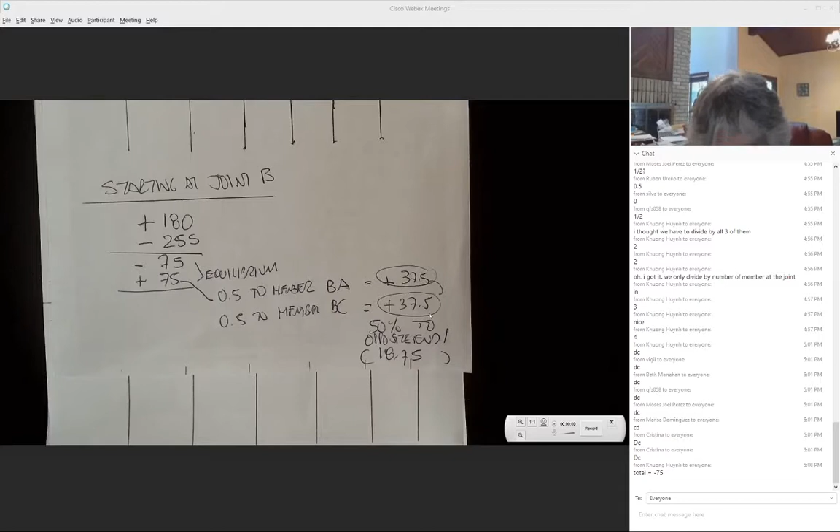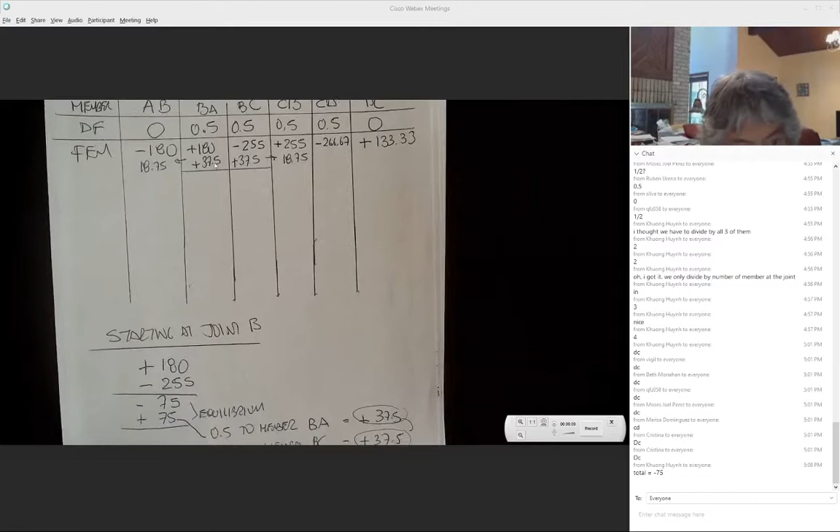50% of plus 75 is plus 37.5. 50% of this is plus 37.5. 50% goes to the opposite end because of the carryover factor. Take 50% to the opposite end, and that is 18.75. Look, plus 75, 50% is 37.5. Plus 75, 50%, 37.5. This line means equilibrium. This line means that I have balanced my joint. Whatever I put in here, the carryover factor kicks 50% to the opposite end. 50% of this value is 18.75, 18.75.

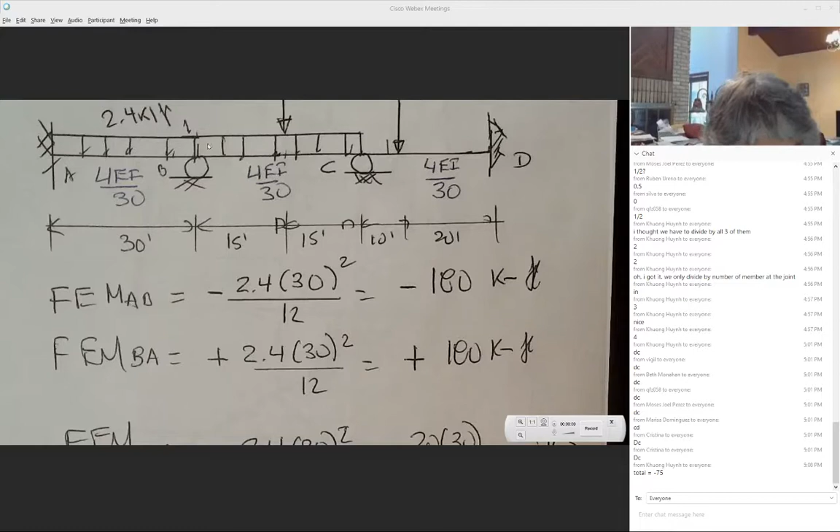So physically, at this joint, I'm putting equilibrium, I'm giving a moment in here. 50% goes to the opposite end because of the carryover. Whatever moment I put in here, 50% goes to the opposite side because of the carryover. So this is what I have right now. 50% of 75, I put it in here, 50% goes across. 50% of 75, I put it here, 50% goes across, with the same sign. So this is a plus, and this is a plus.

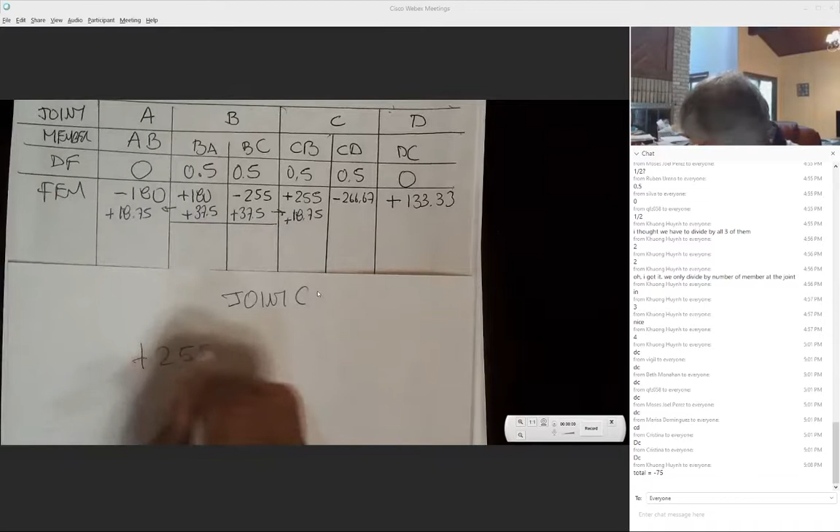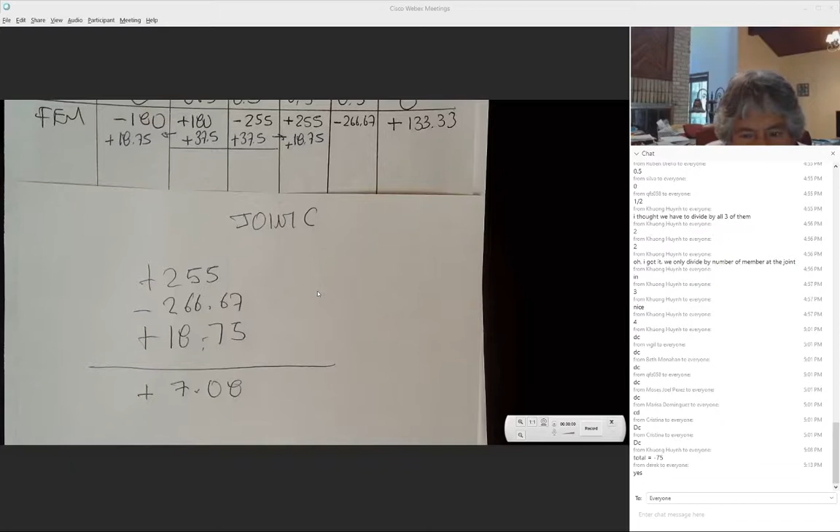Joint A is in equilibrium. Joint D in equilibrium. This is not in equilibrium because, if you look at what I have right now, I'm going to call this joint C. What we have right now is plus 255 minus 266.67 plus 18.75. So this is what we have right now at the joint. So if we add everything, look, 255, 266.67 that is negative, 18.75 that is positive. Check my numbers. Is that correct? Check. So, correct. Okay.

So right now, this joint C is not in equilibrium with all of this moment. Summation of moments has to be equal to 0. So I had to come down here and add all of this moment. 255 came from here. 266 came from here. 18 from here. To put it in equilibrium, to have summation of moment equal to 0, I need to put a minus 7.08. That means equilibrium. Right now, with that, summation of moment equals 0. So 50% is going to come to this member, and 50% to the other. Why? Why is that? Why 50%?

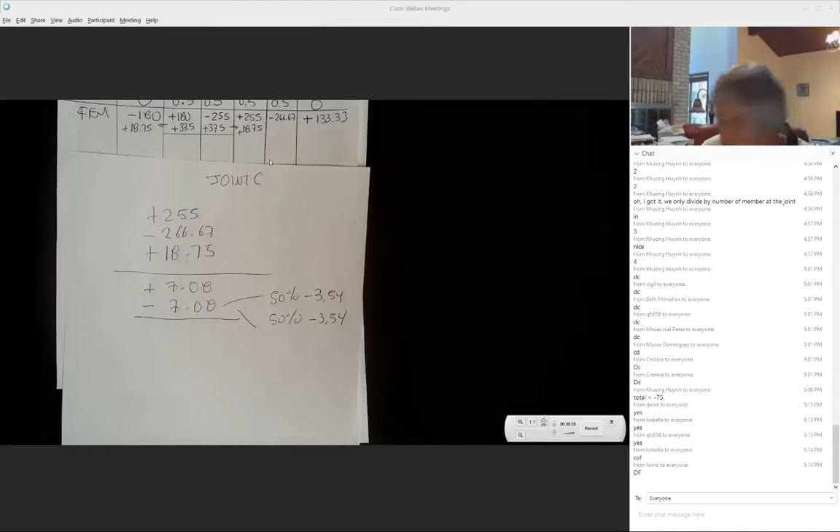Distribution factor, 0.5. Distribution factor is like payday. How much they're going to pay you? You did 50% of the work, your buddy did 50% of the work. Each one gets 50% of the money. Today, it's pretty small money. Minus 3.54, minus 3.54. So to this joint, you're going to go minus 3.54, minus 3.54 because of the distribution factor.

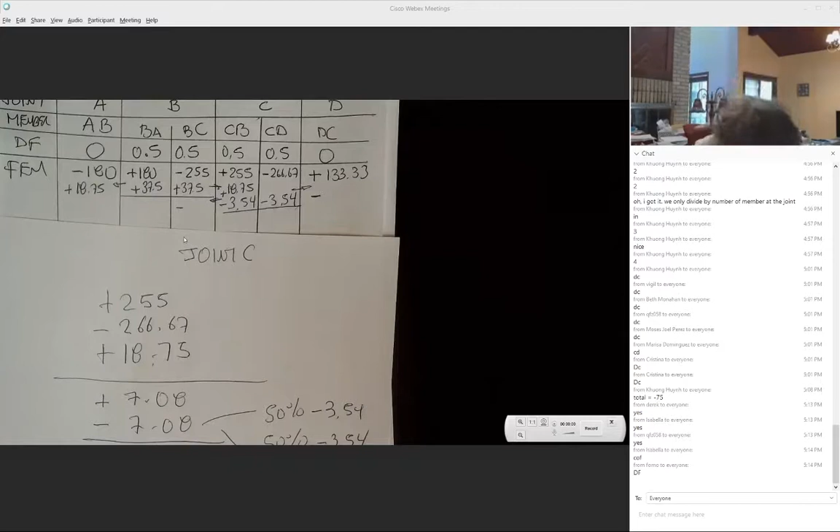And that line in here, this line in here means equilibrium. But since I'm putting moment in here, I need to send 50% to the opposite side and 50% to the opposite side. So whatever moment I put in here, the carryover factor takes 50% across. And so 50% of that is 1.77.

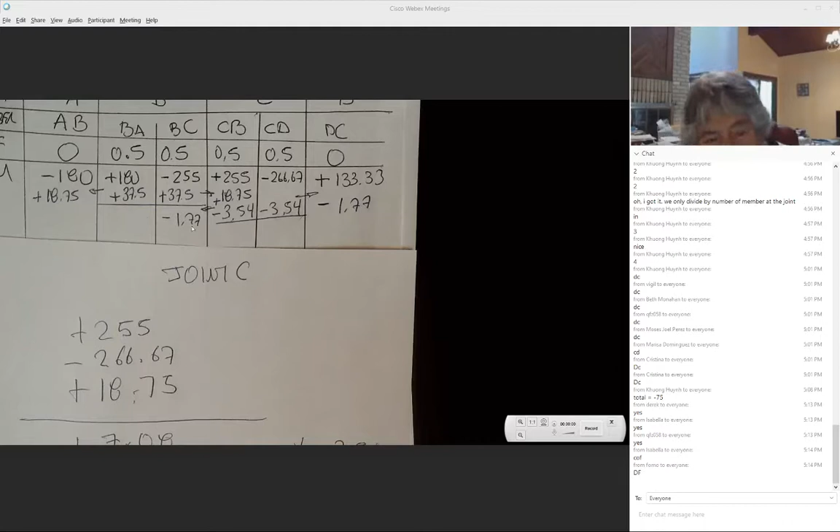And what we're doing, we're going through cycles. Every time that we do a distribution, there's very little moment left. It's like when you pay your bills, all of a sudden there's no money. We're going to get to this point. This joint is always in equilibrium. Right now, the only joint that is not in equilibrium is joint B. The fixed support is always in equilibrium. Fixed support always. This is in equilibrium.

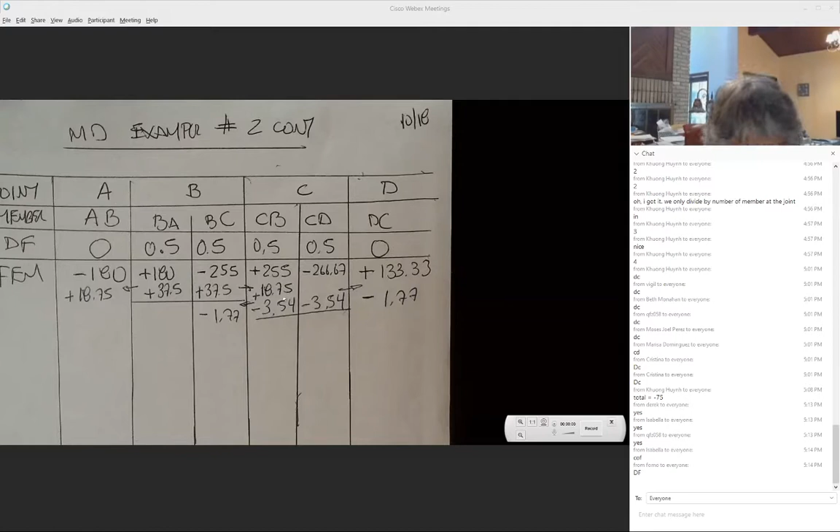We had a small moment, minus 1.77. Minus 1.77 is only on this side. To this joint, I need to give a plus 1.77. 50% comes to here, 50% comes to here. So this is going to be a plus and plus. And so when you multiply that, it gives you 0.885. I'm going to call it 0.89. And we can do that because this is an approximate method. You round that up or down.

Means equilibrium. Whatever I put in here, 50% goes across. And I'm going to write 0.44. If you multiply 0.44 times 2 is 0.88. But this is an approximation, so we can do that if we want. This joint is already in equilibrium. This is always in equilibrium, and this is always in equilibrium. Look, 0.44 is a ridiculous moment, but I want to go to 0.5 and stop.

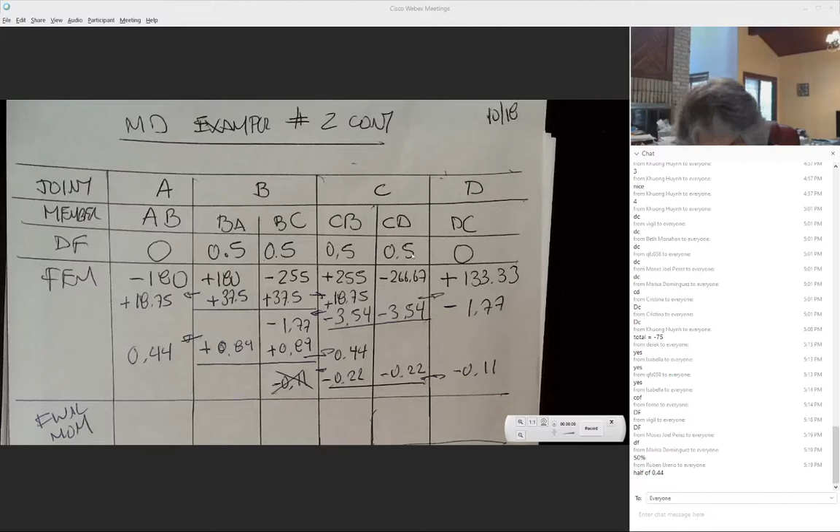I'm going to stop here because I took too much of your time. You really need to learn this because it's going to save your life. It uses fixed end moment from the table. It uses distribution factor. And after that, we need to put each one of these joints in equilibrium. The fixed support always takes moment. These supports in between, whatever they get, they send 50% across because it is the carryover factor. It happens by accident that the distribution factor is 0.5 in here, but it could be any number. But whatever you put in here, 50% goes across.